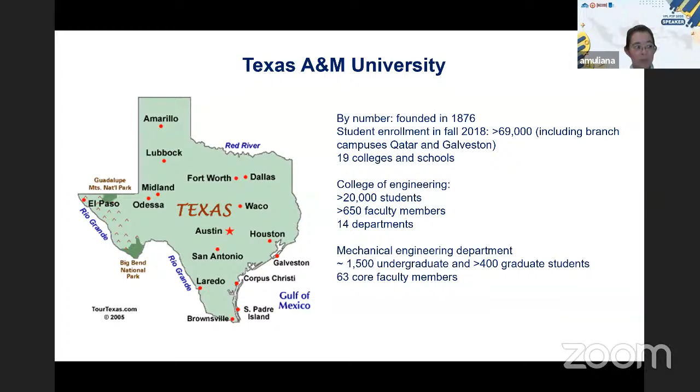Now moving to what I'm actually doing. My core expertise is in solid mechanics. Specifically, we work a lot with polymer and soft material, looking at the response and performance under various stimuli, including mechanical, thermal, electric, and so on.

The exciting thing about polymer is that we can have a polymer with a wide range of properties through control and also polymer blending. Of course, the wide range is still within a certain range.

One thing about this polymer, what makes it exciting or unique, is the macromolecular arrangement. When you look at the overall macroscopic response, we always see what we call nonlinear behavior and time-dependent response. So with all of this nature of the polymer...

It opens the door to many other research opportunities. I'm just going to give you several examples of research areas where, with the knowledge in polymer, we can contribute, but it's not limited to what I'm actually going to share today.

One of these applications: we can also look at what we call a flexible and compliant system. This includes reconfigurable systems of different scales. About two months ago, I presented what we call a flexible facade during an architecture and urban planning virtual lecture.

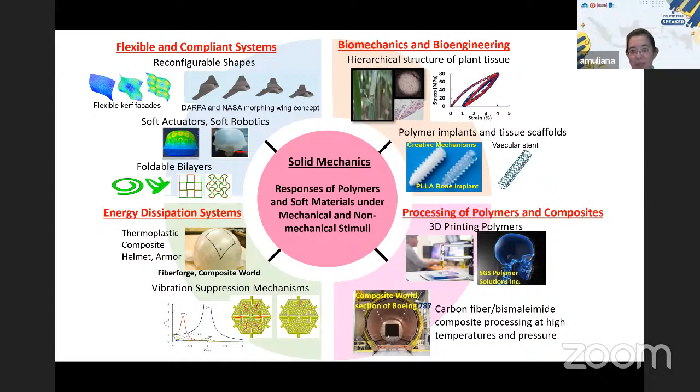So now moving on, what exactly our group has been working on. We focus on the theoretical and computational aspects. We try to describe the time-dependent behavior of polymers and soft materials in general under exposure to mechanical and non-mechanical stimuli. The expectation is to have a digital model we can use to predict the response of the structure prior to the design of the system. The idea is we can really reduce the experimental trial and error process.

Because if we don't have the analysis or tools to give a better prediction, we tend to do experiments with trial and error. It can be time consuming and also costly. So with an informed model, we can minimize that, and hopefully better predict the response of the device that we are designing.

Now to achieve all of this, there are 3 components. First, we need a reliable material model. I'm working with polymers, including composites. One of the main things is the time-dependent aspect, and also the inelastic response.

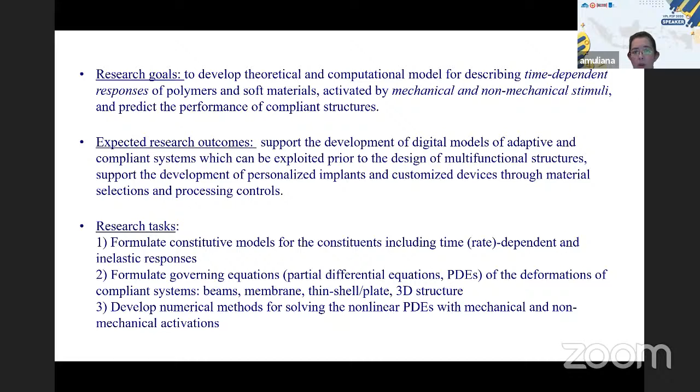So now, as an outline, I will briefly share with you, in all these categories, what we have done in terms of the approach to the modeling and simulation. The first is I'll discuss how we ended up modeling the nonlinear viscoelastic response of polymer when it's exposed to temperature and mechanical stimuli.

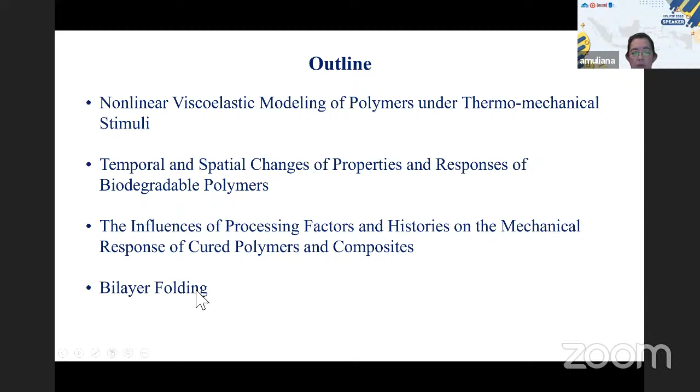The second aspect is within the same idea, but now we are looking at the biodegradable polymer. In the next component, I will share how we approach modeling the processing or cure of the epoxy material and also for the composite. And at the end, I will show an example of capturing the response of this bilayer folding.

Now, for the first example, we work with polyoxymethylene. This is a POM polymer. POM is a thermoplastic polymer. While our group has been working on the modeling and simulation, this is a collaboration with Dr. Berer from Polymer Center in Austria, who gave us all this experimental data to play with.

Just to give a background about what POM is: POM is a thermoplastic polymer, and it is semi-crystalline. When you look at the polymer chart, we have different kinds of polymers depending on their performance and resistance to temperature, right? From the lower charts, where it can resist relatively low temperature, to the high performance polymers that can stand about 400 Celsius.

But of course, 400 Celsius is much less than what metal and ceramic can actually sustain, right? But the advantage of polymer is it's relatively cheap and easy to process. Like I mentioned earlier, we can tailor the properties within a certain range through polymer blending and through processing. That's the advantage of the polymer. It makes it easy for us to mix and match to see what different behavior or performance we could get, right?

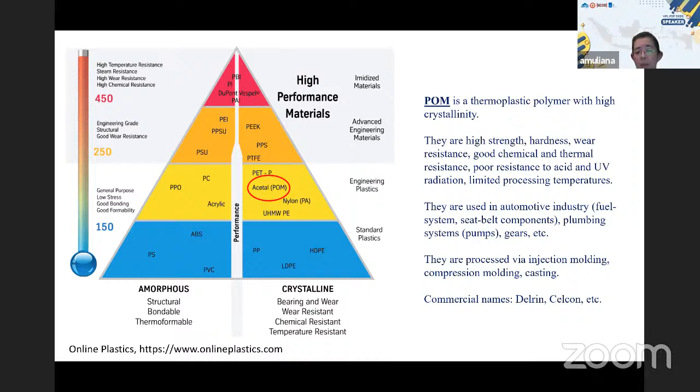So being a thermoplastic polymer, POM specifically is a semi-crystalline polymer, right? Now let's look at the mechanical response. This chart is a typical stress and strain response when we test polymer under tension. Looking at the microstructure, the starting point has all these random long chains, right? As you stretch them, these chains try to realign towards the loading direction.

During this realignment, we can draw or stretch them to relatively large strain. When the polymer network is all aligned in one direction and you keep loading it, we see stiffening, because all these fibers add stiffness to the overall response. Until at some point the polymer network breaks, which is our fracture point. Now, what approach did we take to capture the response of this thermoplastic polymer? We're taking the idea of these microstructural changes.

So when you look at this cartoon, the macroscopic stress strain, what we said is the following. So in its initial condition, the polymer has this random network. When we have this random network, the polymer has its associated physical properties. So this is what we call original microstructure.

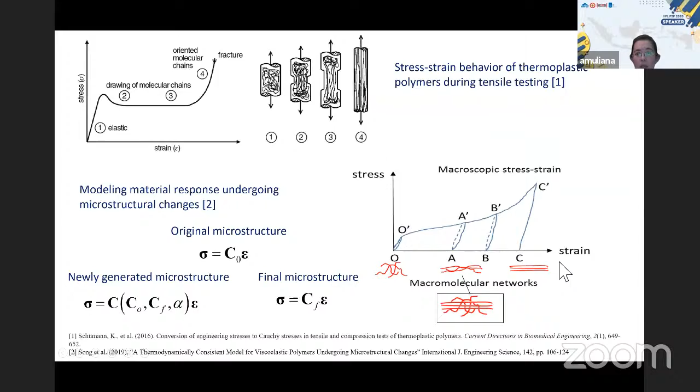Now, how do we address this? I'm not going to go in detail with all of these equations, but the basic thing is we define the free energy. In this case, we define the Gibbs free energy that accounts for initial microstructure and final microstructure, and also accounts for the viscoelastic effect. So in this case, we consider two networks. One network is associated with energy storing capability. The other network is associated with both energy storing and dissipation capability, right?

So as I mentioned earlier, the idea of these microstructural changes and viscoelastic material is that there is energy dissipation. So here we quantify the rate of mechanical energy dissipation. All of these derive from thermodynamics principles. I'm just going to show you the final breakdown here. We can quantify the rate of mechanical dissipation due to the delayed response or viscoelastic effect, and the rate of mechanical dissipation due to the microstructural changes, right?

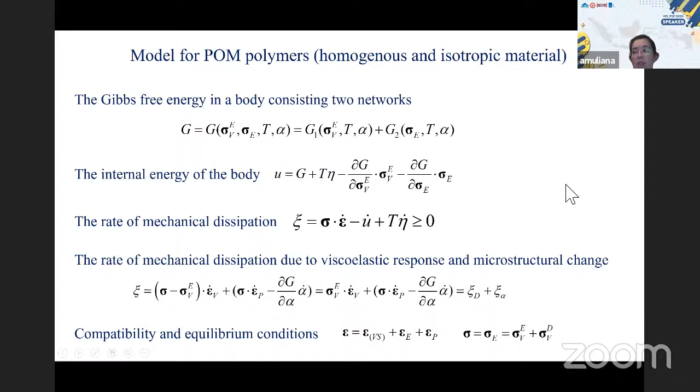So now, through linking the stress and strain, we satisfy compatibility and equilibrium equations. The key point in deriving the model is picking the Gibbs potential. How we pick this, of course, is based on the experimental data available to us. Here we assume isotropic and homogeneous material. Just to show you an example, inside this Gibbs potential we have material parameters, we call them AI and BI, which are temperature dependent. You can think of this as a compliance, or associated with the modulus of the material.

Now the other one, we also define what we call dissipation due to the delayed response. So we also have a material parameter here, which is also temperature dependent. This material parameter is associated with the viscosity of the material. So there we could actually have the viscoelastic response of this material, while also looking at the microstructural changes. When you look at this, I have this alpha, the parameter that I mentioned earlier, right? So this is the volume fraction of the new microstructure.

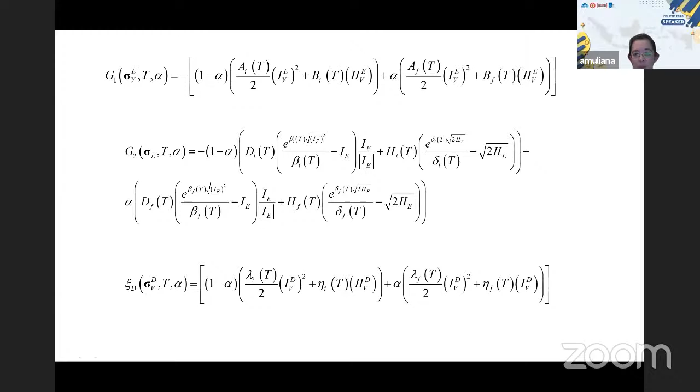So when alpha is 0, we only have the original microstructure. When alpha is 1, we only have the final microstructure. Somewhere in between, we have a combination, right? So from this Gibbs free energy, these are the final expressions for our strain and its relation to stress. This is the rate of the viscoelastic part, and this is the elastic component of strain.

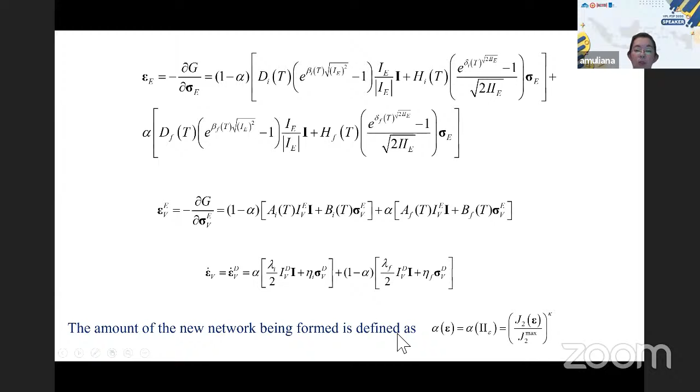So now the question is how we define the microstructural changes, or the state variable alpha. In this case, we associated it with the current strain experienced in the material due to external stimuli. Now, in terms of experimental data available to us, there's been a history of testing. This is creep recovery at different stresses and temperatures.

By creep, we mean we load the specimen up to a certain load and keep it at a constant load. Then we see the deformation, or the strain, continuously increase with time. This is what we call creep loading. When we do loading and unloading, we are able to see a hysteretic response. We also ramp it until failure, and we have data for tension and compression.

Here we just look at the response of different POM polymers. This difference is due to the different molecular weight. When you look at the overall qualitative response, they are more or less the same, but quantitatively there are some variations because of the difference in molecular weight.

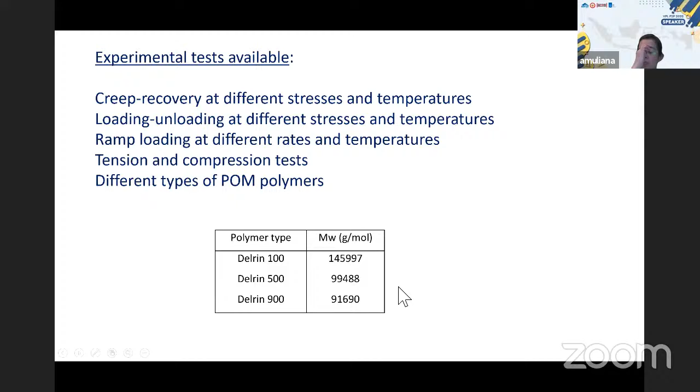Now, just to compare how the model looks with the experiment. These examples show creep recovery under tension at two different isothermal temperatures. The left side is at room temperature and the right side is at 80 Celsius. We have these responses for the three different POMs, which we call Delrin 100, 500, and 900, at two different stress levels. The left side is the low stress level, the other one is the higher stress level.

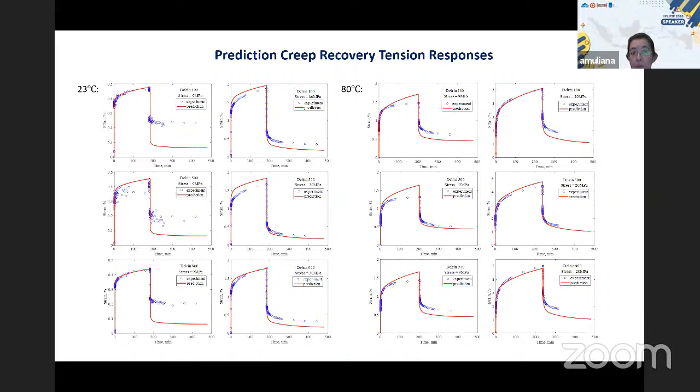The solid line is the response from the model, while the symbols are the response from the experiment. As you can see, the model captures the experimental response quite well. So this is for the creep recovery. Now this is for tension, quasi-static until failure, again for different types of Delrin and at different temperatures. Same thing, the solid line is the model and the symbols are the experiment.

Now I also show you the loading and unloading response under tension at high temperature, 80 Celsius, while the bottom one is loading and unloading under compression. As you notice here, we see a large area. This is the amount of energy being dissipated. In tension, we show larger energy dissipation compared to compression. This energy dissipation is partly due to microstructural changes and also due to the viscoelastic response.

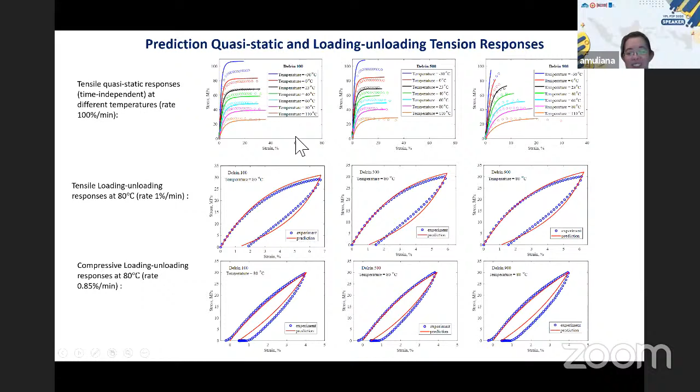So, as you see here, the response of the material changes with temperature, and it also shows the energy being dissipated. So what we're going to do next is: what if we do cyclic loading? We continue this loading, unloading, reloading, unloading for several cycles. That leads to what we call a cyclic or fatigue study.

This is just to show you the simulation of how the fatigue or cyclic response looks. This is at relatively low stress, and this is at relatively high stress. Because of the dissipative mechanism, as we accumulate more and more cycles, the energy being dissipated is converted to heat, which increases the temperature of the body. As the temperature of the body increases, it affects the performance of the polymer.

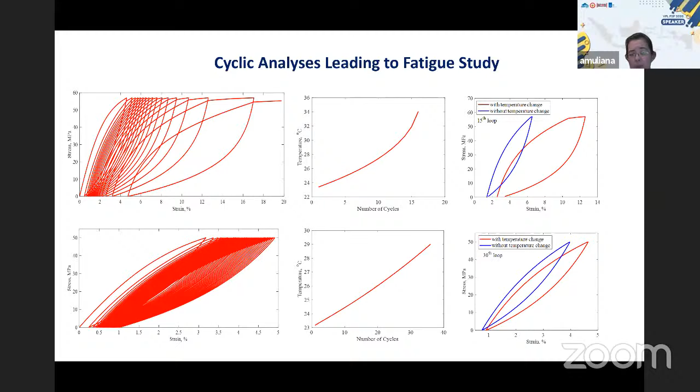So in the long run, we would like to study or predict the fatigue failure of this material. But we don't have the experimental data yet, so up to this point it's only simulation. When we apply this in a structure, this is just a simple beam under loading, unloading, reloading, and unloading. This is the tension region, and this is the compression region.

When we look at 3 or 4 cycles, you already start seeing heating. This is what we call a hot spot. This is the temperature distribution after 4 cycles. We start seeing higher temperature. Now, when you continue for a larger number of cycles, you'll see more and more energy being dissipated, and it will generate more and more heat.

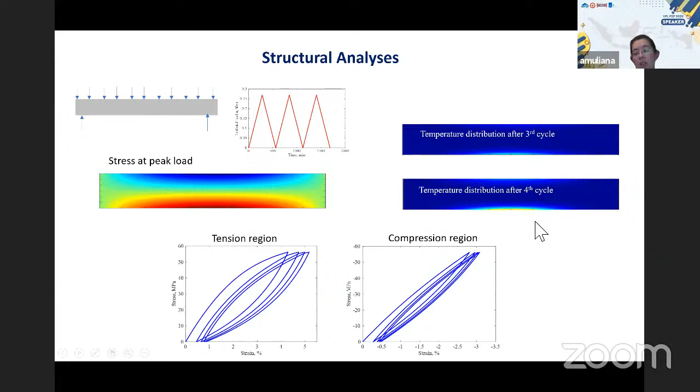So that would increase the body temperature, right? So the consequence of this is that, as the materials are very sensitive to the temperature, this would also lead to what we call later on instability. So this is just to show the simulation.

So this is when we allow the heat conduction, right? This part is due to the dissipation as you continue the cyclic loading. So we'll see temperature build up, right? As the temperature continues to increase, the polymer gets softened. So we'll see through the simulation something like buckling, or it loses stability in this component.

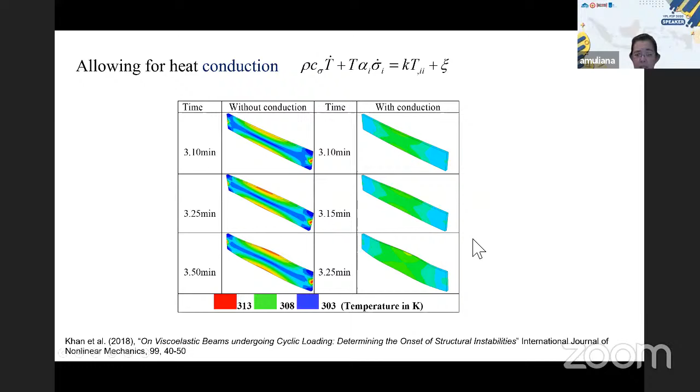So while this response is the temperature increase, this I'm just showing you the strain response of the component. So localized strain you will see at the later time, right? As the polymer gets softer, it undergoes larger deformation. So that's where you start seeing all this failure or instability in the component.

So now the lesson that we could take from here: we see significant thermomechanical coupling, right? On one hand, the mechanical response of the polymer is very sensitive to temperature change. And on the other hand, when this polymer undergoes microstructural changes and is also viscoelastic, it dissipates energy, where if we keep on cycling this material, it generates heat, which in turn changes the properties of the material. So this is what we call the coupling phenomena, right?

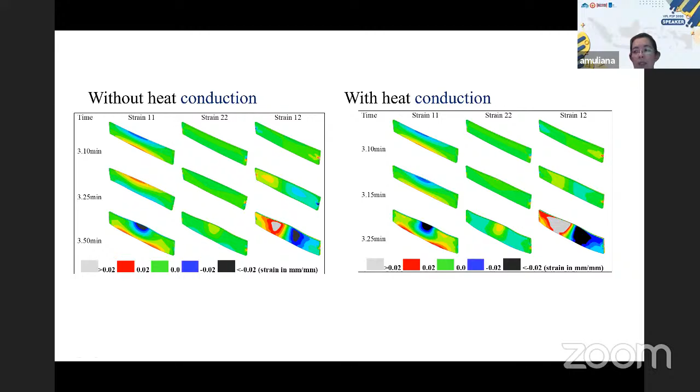So eventually, even though you think you did not apply any temperature, the material would generate heat, and it would eventually lead to structural failure. So this is an example of how we simulate or model a thermomechanical coupling problem.

So the next example I'm going to discuss is, with that knowledge, we can also look at a different problem, but the knowledge can be transferred to predicting or understanding the response of biodegradable polymer, right? Just to give an idea about what biodegradable polymers are: we have synthetic polymers. We also have natural polymers.

So the synthetic polymers are polylactic acid or polyglycolic acid, and the combination of those, which is what we call PLGA, and so on. These polymers are biocompatible and they are non-toxic. So that's why they found many applications in biomedicine, right? For example, in tissue scaffolds, implants, or drug delivery. So these are the applications.

We also find applications in packaging for biodegradable polymers. And you can also see them in agriculture, right? This is for the controlled release of agrochemicals. So, well, what is the degradation process? Why do we call it biodegradable? The degradation is through hydrolysis, meaning it needs an aqueous environment.

So it starts with water diffusing through the polymer body. There is a reaction, right? That induces scission, meaning a breaking of the polymer chain. So the long polymer now breaks into smaller chains. And if this breaking continues, it will lead to the formation of what we call water-soluble materials, right? These water-soluble materials can diffuse out of the polymer body. This is what we call erosion.

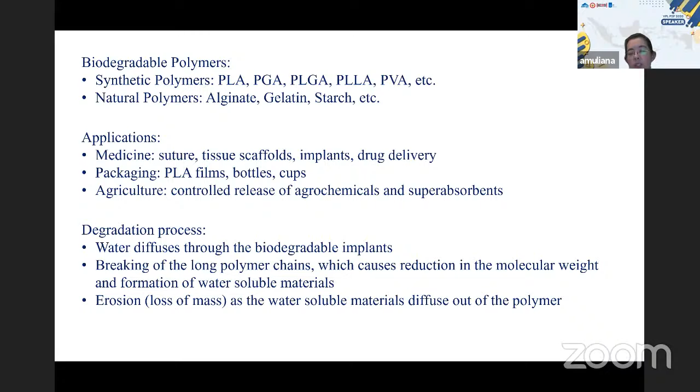So what we did, okay, we need all these basic components. Start with the diffusion of water. CF is the water concentration, right? And we also have this component for the water consumption during the hydrolysis process. And some studies suggest that when you strain them and there is mechanical loading, it also alters the diffusion process. Then you can also include that component here, right?

So now during hydrolysis, as the polymer chain is breaking into smaller and smaller chains, it's quantified through the molecular weight change. The molecular weight decreases as the hydrolysis process continues. So this decrease in molecular weight is, in our case, how we look at the degradation.

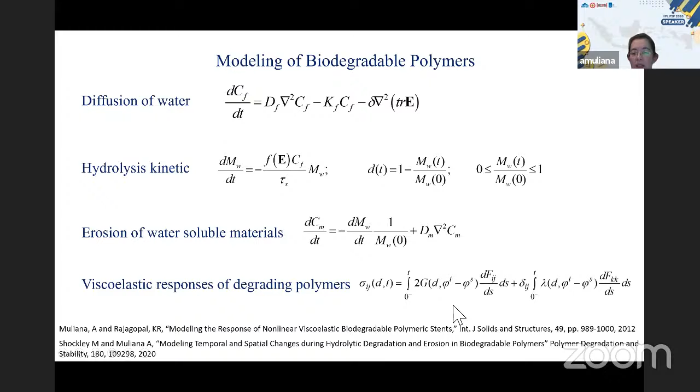So the degradation stage is when we see how much now the current molecular weight compares to the initial molecular weight. Now, when there is an erosion, this water-soluble material, which we call CM, diffuses out of the polymer body, so we also incorporate another kinetic process. As for the polymer itself, this is a viscoelastic material, and the property changes as the polymer degrades because the molecular weight changes.

So we incorporate all of this inside this constitutive equation. Now, just to show the prediction, this is the stress relaxation of PLLA fiber at different strain levels. We see this is only for a 10 minute test. The stress relaxing, again, the solid lines are the model, which can capture the experiment. Here is also the stress relaxation after different stages or times of immersion or degradation: 0 meaning early time, and after 6 months and 9 months of degradation.

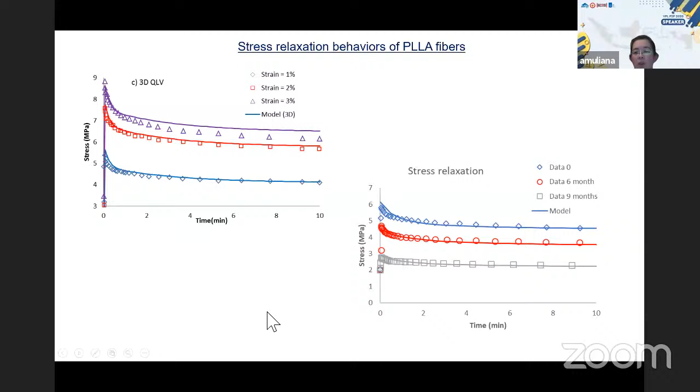So now if we already have a model in mind, the next step is for us to just play around. What if we have a stent structure? Then you include all the material properties and parameters that you already calibrated. Then we want to see whether the stent design is reliable and to what extent we might need to change the design. This just shows you that at the junction here, we might have faster degradation because it has higher stresses due to all this stress concentration. But what is missing in this model is actually we did not include the erosion.

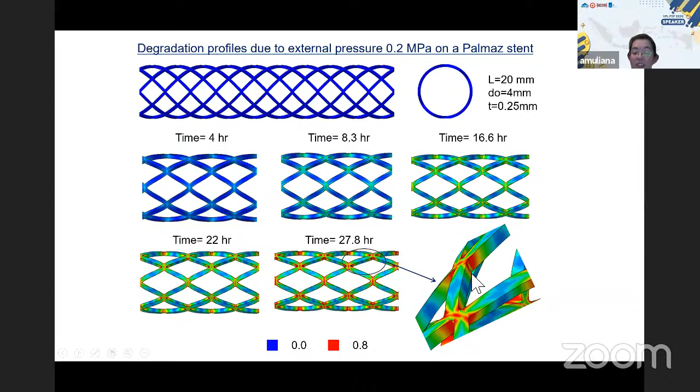So when there is an erosion, the size and the geometry of this polymer should also change. So that's what I'm going to discuss in a minute.

This also just shows you another design of stent when we look at the cyclic loading. So when you do loading and unloading, because of the degradation and also the viscoelastic effect, you would see the hoop strain here continuously increasing with time. At some point, you cannot keep on with this strain continuously increasing. So at some point it will undergo failure and breaking of this stent.

So when we design, we need to have a design criteria in terms of what is the load bearing ability and the limit design. Then we could do a proper design to avoid a catastrophic failure.

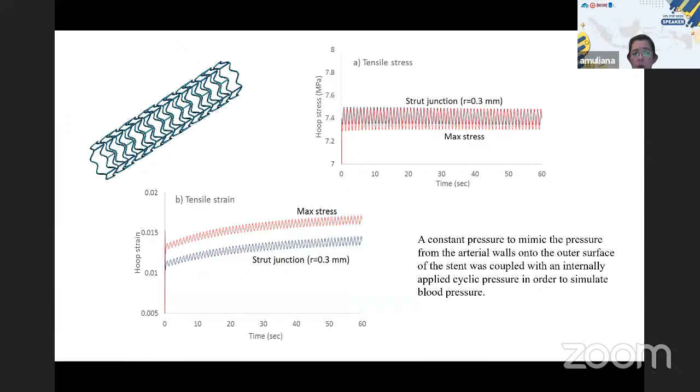Now, how do we model the shape and size change during the degradation? So we look at what we call the level set. This tells us where is the moving boundary, where is the boundary now. So phi here is the variable that tells us the body or the geometric component. When it is less than 0, we have a solid polymer. When this is greater than 0, it's all fluid environment. And when it is 0, that's our boundary.

So what we are doing is we're tracking the boundary, and the speed of this boundary change is related to actually the amount of water soluble material that exists in the polymer. So this is how we actually track the changes in the size and the geometry during the erosion.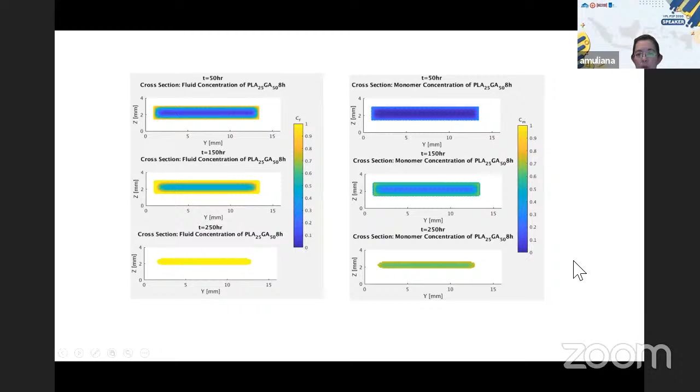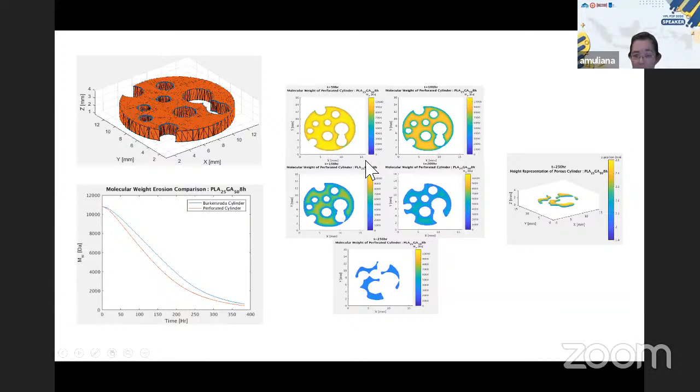So now we also want to see what if we have a perforated polymer, because when we use it in a scaffold, it's often in a porous domain, not going to be a solid disc. As expected, when you have a perforated structure, it degrades faster. But one thing is, when you do have a perforated structure, you might end up at a later stage where this component breaks into pieces, because I guess the junctions would degrade away as the erosion takes place.

And here just to show you what if we have another shape, because all this geometry, the initial geometry, would affect the degradation process.

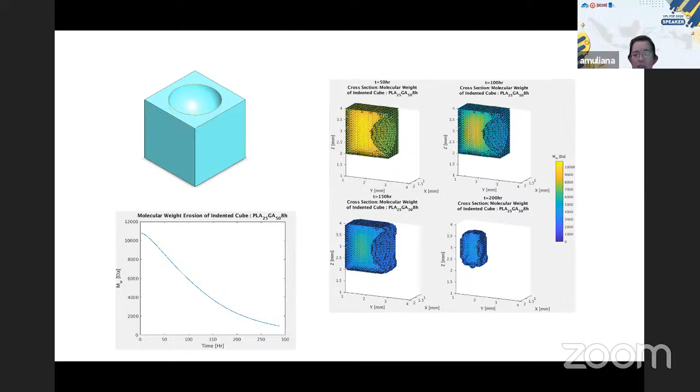So we just want to show how we can capture all of these size and geometry changes. In addition, we're also taking into account the molecular weight change and the hydrolysis process. So from those two studies, now within the same kind of spectrum or knowledge, we could also apply this to understand the curing process in the polymer, because all of those involve the temporal and spatial changes in the physical properties of the polymer.

Just to give a small background on polymer or epoxy curing: it involves phase transformation from the liquid epoxy to the solid epoxy. This is often done at higher temperature to accelerate curing, although you can do it at lower temperature, but the process takes longer. During this curing, the curing reaction is exothermic, so it generates a significant amount of heat, which increases the body temperature.

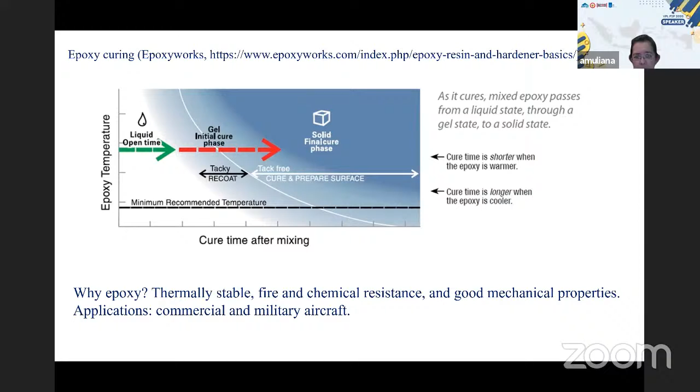At the same time, during solidification, there is shrinkage. So we have a competing effect between expansion and shrinkage. All of this affects the curing process in the polymer, and can generate thermal stress. If we have excessive thermal stress, it might induce defects - these are called processing defects, which is something we want to control or mitigate. Now, how do we do this? Of course, we need to understand the entire processing factor and history of this polymer.

Without going into detail, the essential mechanics we capture is heat generation and conduction, because it involves high temperature. So we have it at a relatively high temperature, there is conduction, and during this curing process heat is being generated. This curing process also depends on the temperature and pressure - when you change the pressure and temperature, it changes the curing reaction rate.

Being viscoelastic, the property changes with the degree of curing and temperature. So when it's in the liquid stage, it's highly viscous. As it gets solidified, the polymer is harder, so the viscosity is actually increasing. All of this affects the overall viscoelastic response of the polymer.

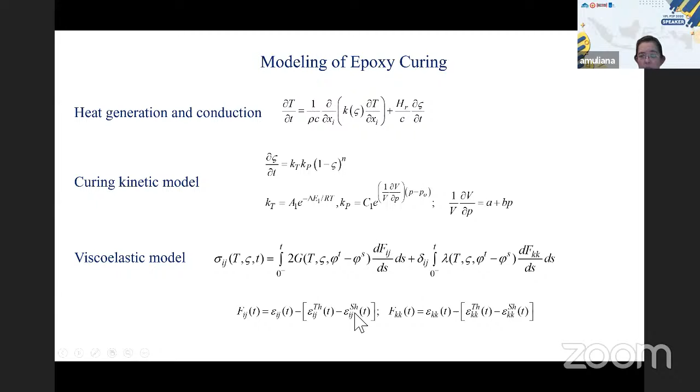We also incorporate the expansion and shrinkage in capturing this epoxy curing, accounting for changes in physical properties - thermal conductivity, thermal expansion, and mechanical properties. This is the shrinkage model. All of this change from the liquid state to the solid state will also affect the overall curing response.

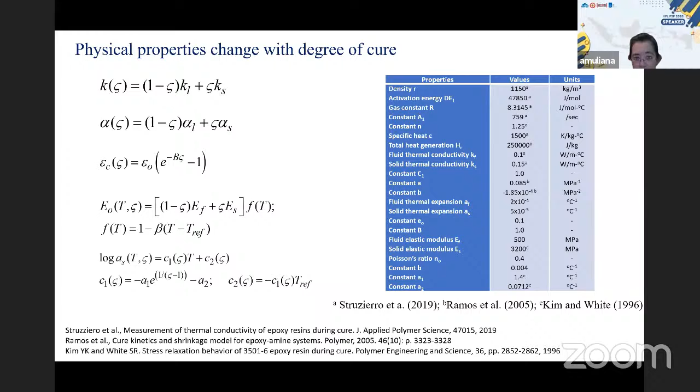What I'm trying to show here is that when you change the temperature, from low to high temperature, high temperature cures faster. So at low temperature, for example this is at 90 degrees, even after you wait like 400 minutes, it does not undergo full curing. Another way, we could also apply relatively low heating.

This is when you ramp the temperature 1 Celsius per minute, compared to what we call isothermal curing, where you just heat it up often to the very high temperature without controlling the heating rate. This will have different effects on the polymer curing.

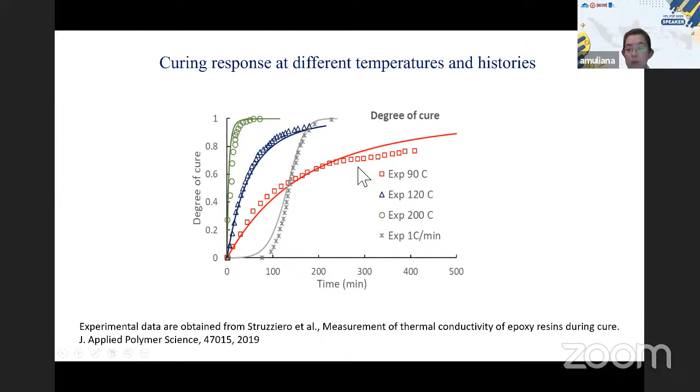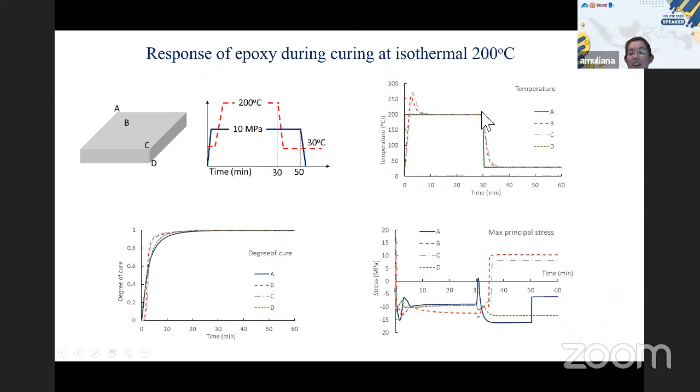One thing I also mentioned is that curing is exothermic, it generates heat. So you say, okay, my cure temperature is 200, but because of this exothermic process, it can go much higher than that. All of this will affect the response of the cured polymer.

Just to show you how the space and time change - this is just to show the contour of the temperature and stress. In the beginning, the temperature is still increasing.

So we see expansion as the polymer becomes larger due to the expansion effect. As it cures, it shrinks. Now at the final state, we have uniform room temperature after cool down, while we still see residual stress, and also warping in this polymer due to the non-uniform shrinkage and non-uniform expansion.

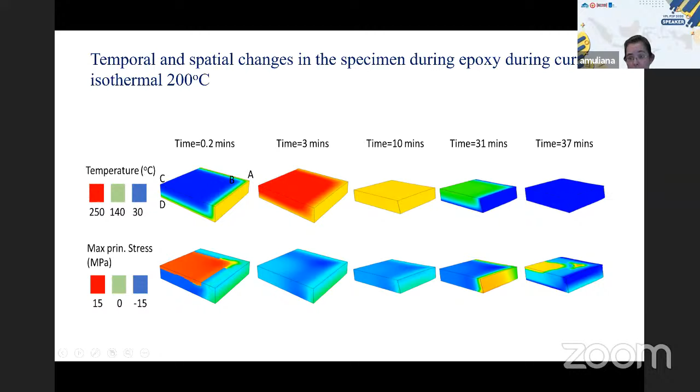This is actually unwanted. So as much as possible, you don't want to have warping in the polymer sample. Just to compare, when we cure it at a different, lower temperature, you can minimize all those effects. However, lower temperature might take longer for you to cure, right?

So this is just to show you the table. When we do it at room temperature, even after 1300 minutes, it's still not cured. So when we go with higher temperature, it cures faster. But one thing though, when we compare this at 90 degrees, the modulus is slightly lower at 200 because of the build up in the residual stress that would reduce the modulus of the polymer.

So now, what if we do a slow heating? With slow heating, the cure time, 60 minutes, is not too bad, and we have a properly cured sample with relatively high modulus. So when you look at the slow heating, it's more uniform curing when you see the degree of curing at different locations. So with more uniform curing, we minimize the effect of this residual stress.

As you can see, we see some changes in the stress, and they're all fluctuating very close to the 10 megapascal pressure that we prescribe. At the end, the residual stress is actually very small, minimal, compared to the previous example that I gave you. So all of this has a consequence on the material response.

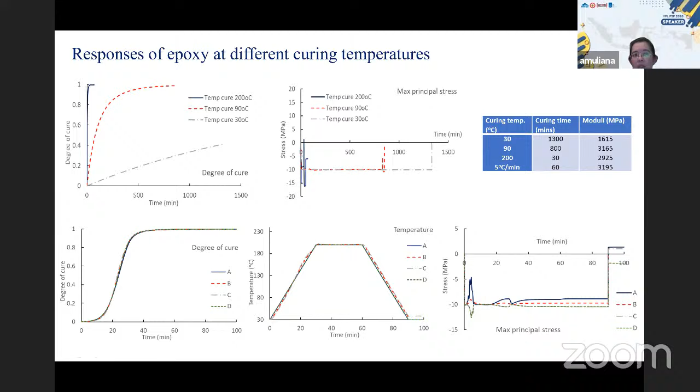Now, when we use this epoxy in the composite, the response will be complicated because of the existence of fiber. This is just to show a simple microstructure when we cure the composite. In the beginning, we see swelling because of the expansion due to heating. At the end, we see shrinkage. This would induce stresses in the material, which would also affect the moduli of the composite sample.

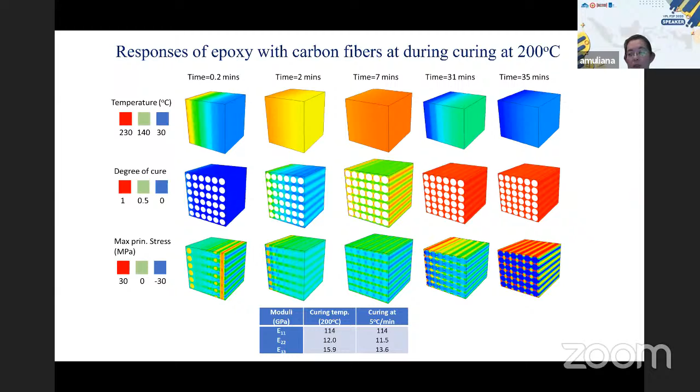So this is where we say, okay, being able to control the curing process is the key to having a good finish of the epoxy and the composite eventually.

So my final example is actually how we want to capture the bilayers of the polymer folding. The idea of this is for microfabrications, and I'm showing you two articles which I think are interesting. The first one is the combination bilayer out of polymer and gold. The activation here is through voltage or electric field. Because of the significantly different response between the two layers, through the electric field activation, you can achieve all these folded shapes.

In the second example, this is a bilayer of two different polymers with significantly different physical properties. Through non-mechanical stimulus, for example temperature, pH, or moisture, you can achieve different folding shapes. This example is the polymer folding by Stoychev, where the folding is due to moisture absorption, because in the bilayer they have two different layers: one is a hydrophilic polymer and the other is a non-active polymer.

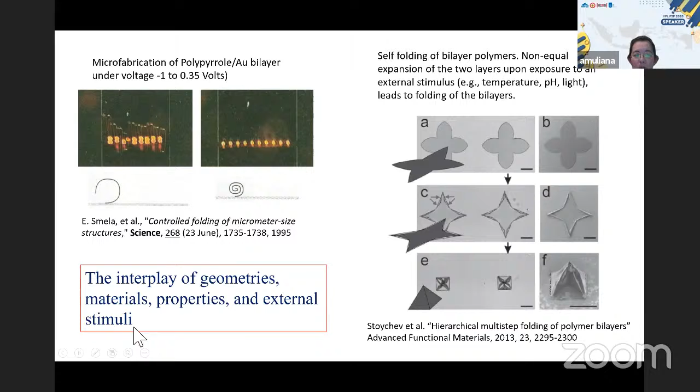So the key of this is looking at the interplay between the geometry, the material, the properties, and of course the external stimuli. The purpose is for microfabrication. When you have a very, very small scale, it's really difficult to generate a complex shape or geometry. Through the idea of this folding, you can achieve various complex geometries, but of course we need to know the interplay for all of these aspects.

Just to give you a simple example of this bilayer: we have the constitutive model for the substrate, this is an inactive layer, and we also have a model for the active layer. Depending on the activation mechanism, in this example we show with the electric field, so that's what we need the constitutive model for electric field.

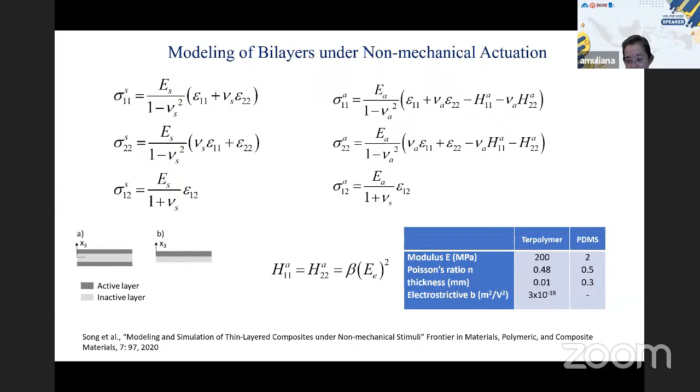If you use temperature or moisture, you might have a different constitutive model. So with all of these constitutive models you put together in the bilayer. This is a very thin layer, so we use a shell element in order to capture this. Now we look at the response when we activate it with different electric fields. Of course the response would really depend on the geometry of this component.

When we look at just a square geometry, in the beginning it tends to create the dome shape, because the minute you activate the electric field, there will be stretching uniformly across this plate. However, these plates need to achieve their stable state. So at some point there is a snap, and it goes to the cylindrical state, because this is actually the stable state, which requires a small amount of energy.

Why it cannot sustain the dome shape is because we start with a flat panel, and the Gaussian curvature of this flat panel is 0. When we just apply the electric field, we tend to create a shape, but we cannot create a dome shape without stretching. The only shape that can be created without stretching or cutting the sample is one with zero Gaussian curvature. Because it starts as a flat panel with zero Gaussian curvature, it ends up in this rolling state. The same thing when we have a stripe, it's easier because of the aspect ratio.

So it immediately creates this folded pattern. And you also notice there is warping here. It's not a clean folding; you see all this warping effect. This is because when we activate it, there is also stretching in the lateral direction that creates all of this warping effect.

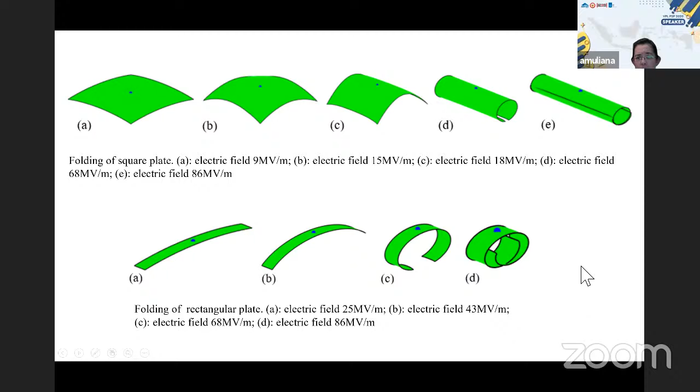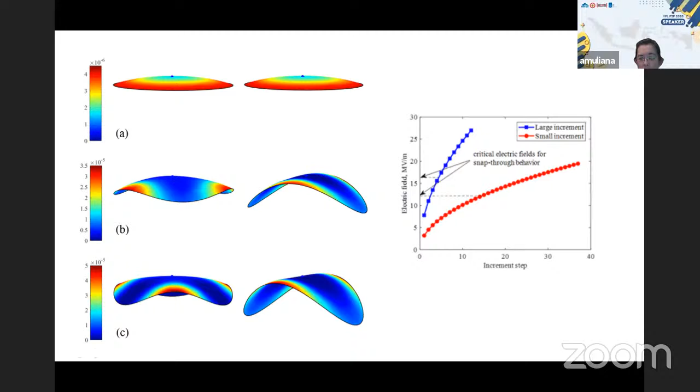Another aspect we want to show: since we are dealing with polymer, it has all this delayed or time-dependent response. So you can activate it, and if you hold it at a certain amplitude, with time it could generate continuous folding. This is because of the delayed response due to the viscoelastic effect in the polymer.

So with that, I shared with you how we model the polymer from the constituent, looking only at the polymer response, and how we can also bring this to the structural scale. I gave an example here in bilayer folding. All of this requires basic knowledge in the mechanics of polymers, including the nonlinear response, to achieve all of this response.

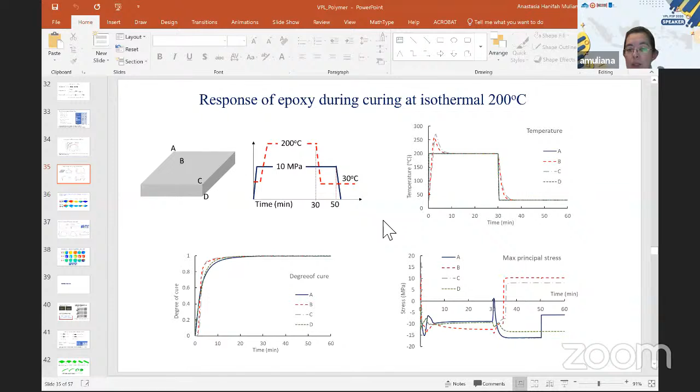So realistically, we generally don't cure at room temperature. This is like what you would see in a simulation, right? So even after a longer time, you don't really see it undergo a full cure. Obviously there is a limit of time that you want to wait for this or do the processing. Right? So that's why typically we don't really cure the epoxy at room temperature.

If we do that, usually we stop it, let's say after a day or two, and you don't really get what we call a good quality. It might get hardened, but it's not really cured in the sense of forming a crosslink.

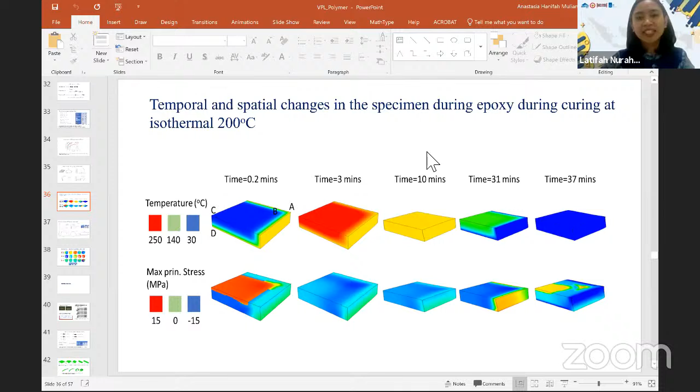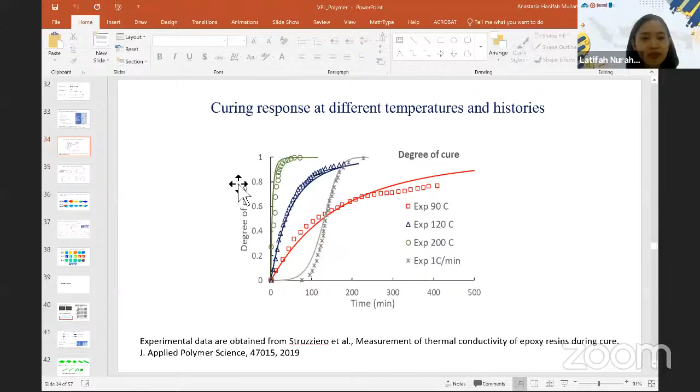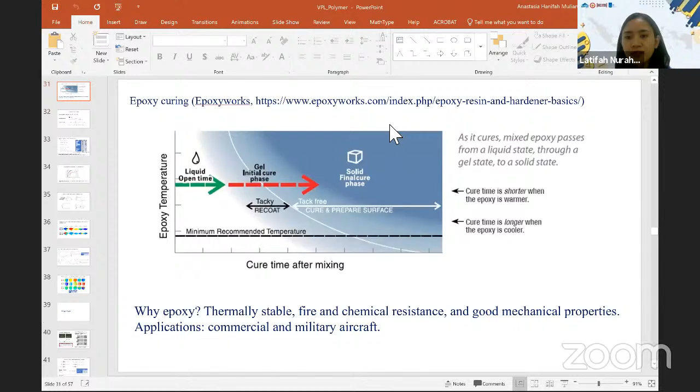I will read the next question here from Pak Irfan Hidayat from Materials and Metallurgy. He is talking about the moving boundary during the process, which Professor Anastasia has presented. He's asking, are there other techniques to track the moving boundary than using the level set? He said the level set function has been used to track the moving boundary; is there any other technique for doing so?

Probably there is, but maybe I'm not familiar with it. And to the best of your knowledge, why is the level set function preferred over other techniques? Because what I see with this level set function is pretty straightforward, right? If you look at the kinetics of the moving boundary, Phi here is our domain, so this is the rate of its domain change. You can think of it as a kinetic process: the speed, how fast the boundary should change.

So we can really associate this with the concentration of water-soluble material, in this case what we call the monomer. This is why we said the level set is pretty easy to implement and straightforward. We can include this within our finite element or finite difference approach. So this is the reason why we use the level set method for the moving boundary.

Well, there might be some other techniques or tools, but I'm not familiar with them. This is the technique I'm familiar with, so that's what we're using. So if you ask what the advantage is compared to others, I cannot answer that because I'm not familiar with what other tools are out there.

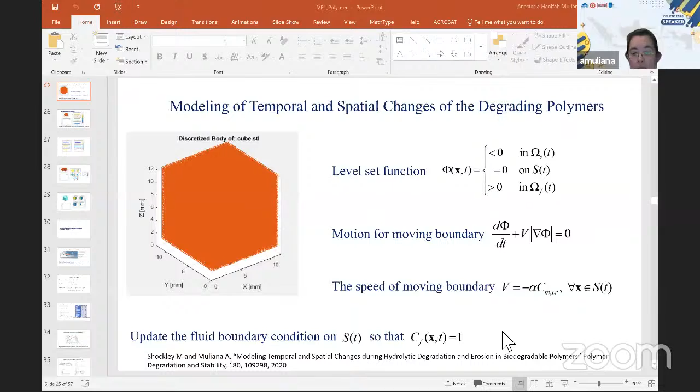The next question here is from Bu Yanurita Dwi Hapsari from the Physics Department. She says that it was an interesting talk from you, Professor Anastasia. Then she's asking, do you include cross-linking in your viscoelastic model? Well, so it depends. So when you talk about the polymer processing, I did not specifically mention this, but here it is.

So this rate of curing psi here actually indicates the amount of crosslink being formed. When it is initially 0, we don't really have a crosslink. At fully cured, you have a highly crosslinked state, close to 1. So that's where we look at this epoxy, because it's true cross-linking.

But now when you ask about the other polymers that I presented, for example the biodegradable or POM, it is a thermoplastic and semi-crystalline, so it has amorphous and crystalline components, so it's not through cross-linking. So that's why we did not have any cross-linking embedded in that polymer. And how do you think the cross-linking affects the viscoelasticity? What is your opinion about that?

Well, the idea of this cross-linking is it forms like a bond, right? So when you stretch them or when you release it, unless this is breaking, you can stretch the polymer to some extent, to a certain level. But now when you look at the viscoelasticity, the mechanism is due to the delayed response. The idea is because the polymer has a long chain, right? So when all this long chain is entangled, now you try to load them.